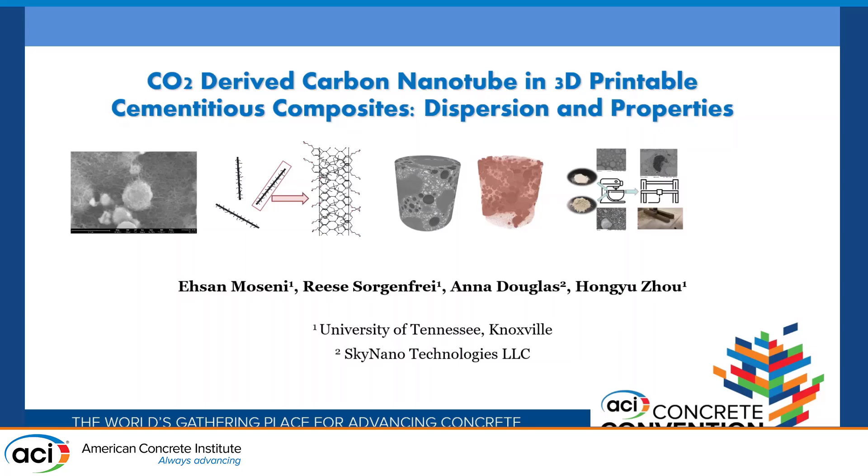Today I will be talking about a fairly preliminary stage study of using CO2-derived CNTs and nano-structured carbon in 3D printable concrete mixture. This is a collaboration between University of Tennessee and SkyNano Technology, a startup spun off from Vanderbilt University. The founder, Dr. Anna Douglas, did her PhD in chemical engineering and started a very interesting process.

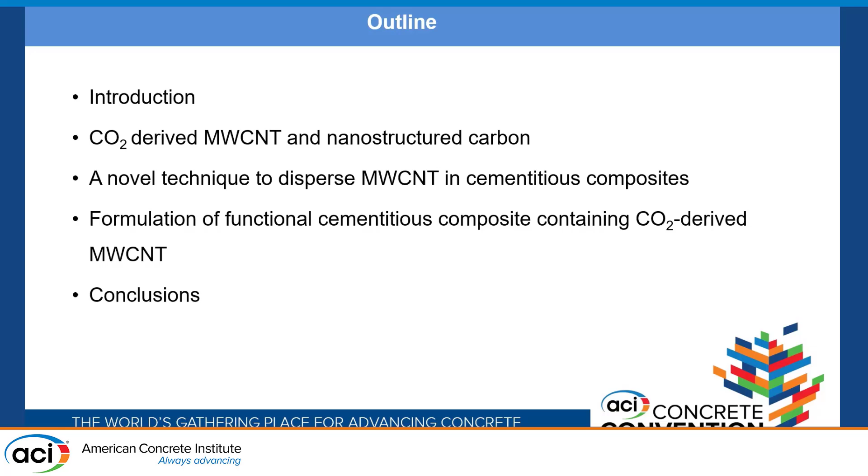I'll talk a little bit about the background in concrete decarbonization and the process of converting CO2 into nanostructured carbon, the dispersion of that into cementitious systems, and some preliminary tests on the 3D printing side that we have done in our lab, followed by some conclusions.

As we all know, cement manufacturing is a carbon-intensive process. The CO2 emissions primarily come from two sources: the heating and combustion of fuels releases CO2, and the decarbonation of calcite from limestone also produces a fair amount of CO2.

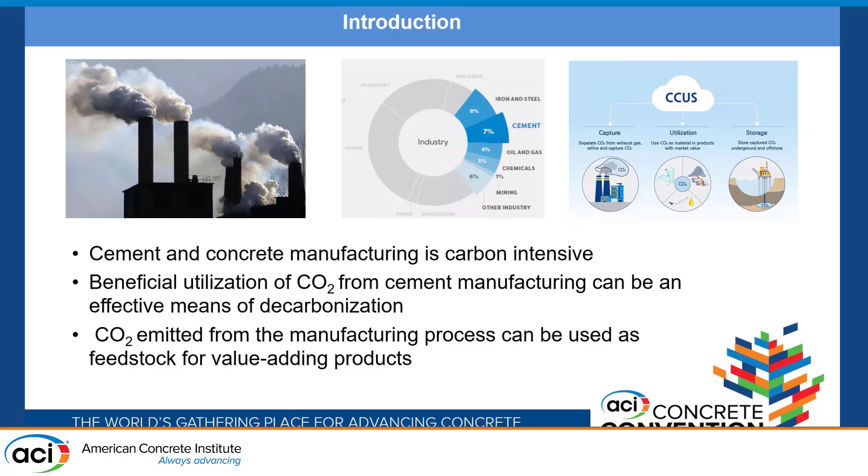In trying to decarbonize cement and concrete, we take two approaches. One is trying to beneficially utilize CO2 to produce a value-adding product, and at the same time, in concrete manufacturing, we try to reduce the use of Portland cement as much as possible, often by increasing the use of SCMs, or supplementary cementitious materials. The thinking for this project is can we combine these two approaches and find a synergistic way of decarbonizing cement products.

One of the technologies, developed by SkyNano, is an electrochemical process. This wasn't invented recently - it's been known for over 100 years that in a molten salt reactor, typically using lithium carbonate, and using an electric field, carbon deposits on the cathode side. The CO2 is used as a feedstock in the reaction, and oxygen is released on the anode side.

But until recently - this was the PhD study of Dr. Douglas and SkyNano - the discovery was that by templating the surface structure of the cathode, you can essentially control how the carbon is deposited and its morphology, going from carbon nanotubes to much larger carbon particles, which I'll show a bit later.

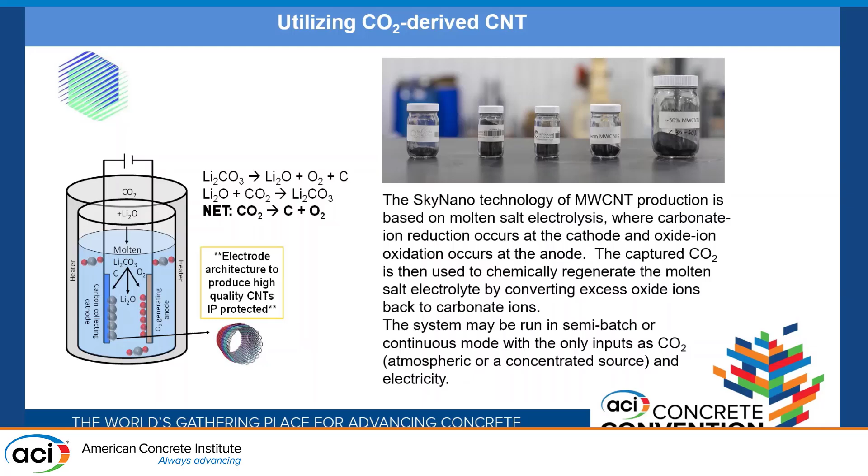So the thinking is, if we wanted to consume the CO2 released from the cement manufacturing process, this is an early stage sketch where we take the exhaust gas from the cement kiln and use that in the reaction to produce carbon nanoparticles.

Once again, by controlling how much electricity or current passes through, as well as the cathode structure, they can produce different forms of carbon, going from smaller diameter carbon nanotubes to what they call carbon zoo - larger carbon particles. They have explored applications in batteries and tires, to replace carbon black in that sense.

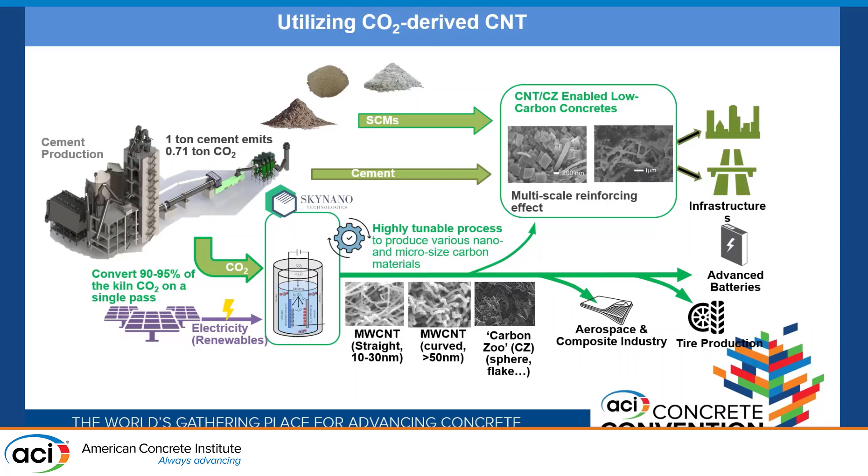For us, in this process, we're thinking: can we use part of the carbon that's been produced, in synergy with SCM, to produce a lower carbon footprint concrete product. That's the goal. And in that process, of course, the challenge is dispersion - that's something we looked at first in this research.

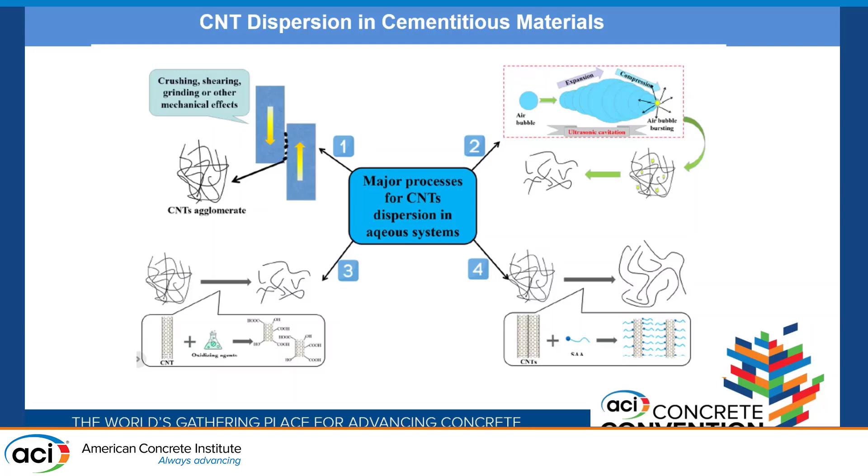Dispersion of CNT in cementitious systems has been studied for quite a while, using different approaches from mechanical sonication to chemical methods like surface grafting or dispersants to try to disperse the particles. One challenge, following the dispersion process, is that to use it in a cementitious composite system, we want a stable suspension before mixing with cement. Having a longer storage shelf life is challenging because once dispersed, these nanoparticles tend to agglomerate.

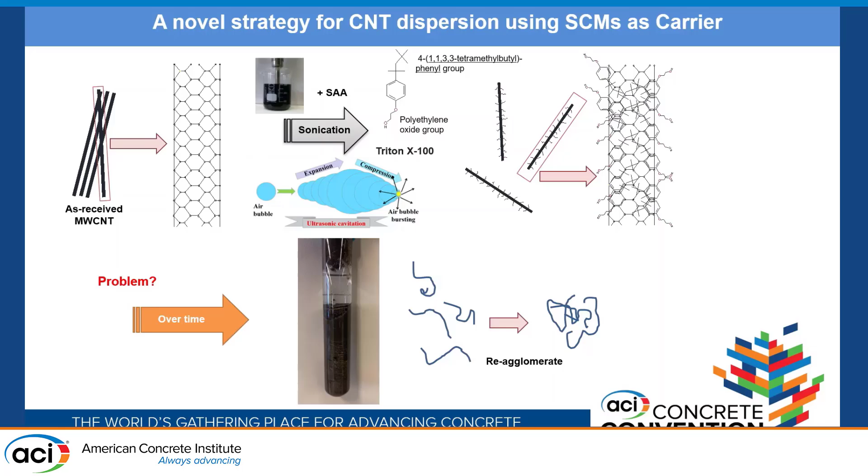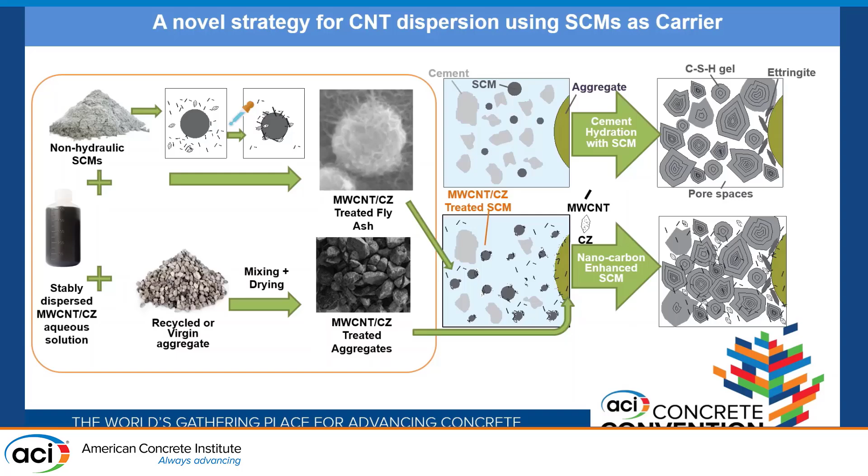So one idea is: if we use SCM in conjunction with the dispersant, can we use the SCM somewhat as a carrier to deliver the nanoparticles in the cementitious system? We started experimenting by simply mixing SCMs with the slurry - we tried fly ash, and both fly ash and silica fume together. First we sonicate with dispersant, a typical way of dispersing CNTs, then we added the SCMs, in this case both fly ash and silica fume, to produce the slurry.

Does it work? Of course not. That's just part of the process.

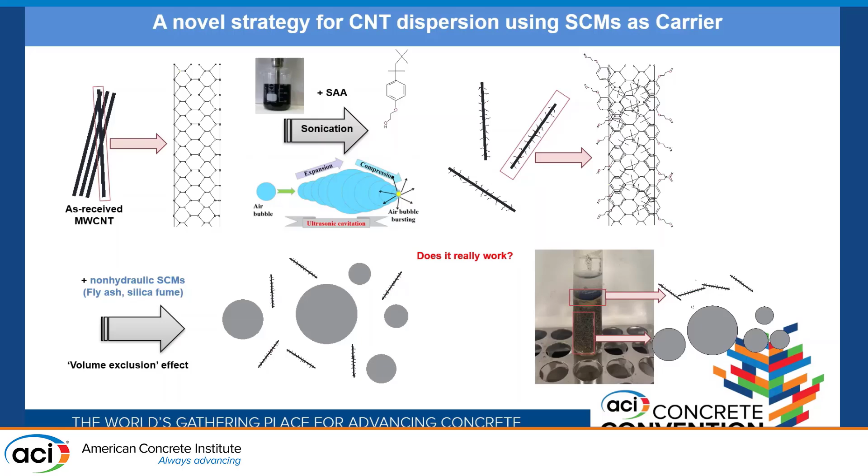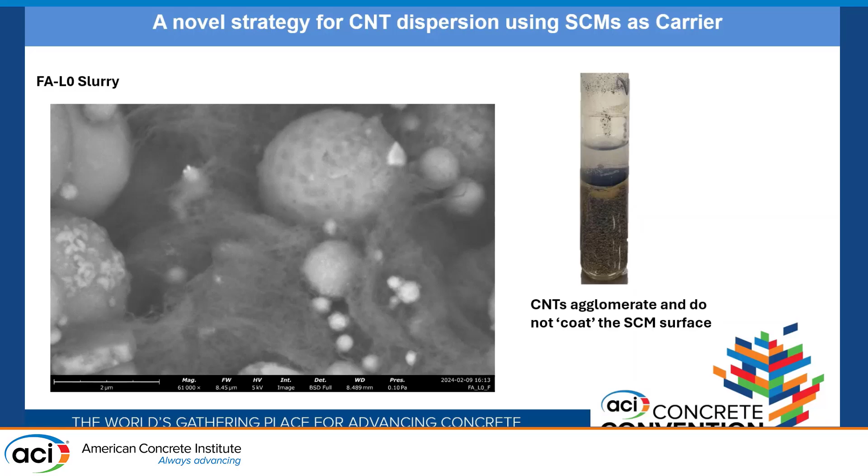After about a day, it's still separated. We see the deposition of the SCM particles on the very bottom, and then the carbon forms a layer, and everything is separated. So we took some slurry, put it under SEM, and can clearly see fly ash stay fly ash. There's nothing really attached to it, and all the nanotube is still agglomerated around it. So going from there, we said, can we just change things a little bit?

So we added latex particles, because before we had another project dispersing CNTs in latex, and it was fairly successful and easy to do, and latex is added into concrete. We said, why not? We basically used a polyacrylic latex polymer, hoping some of those functional groups on the latex polymers would associate with the dispersant and attach it to the SCM surface.

So we simply mixed those ingredients, and separation happened again. This time, we just simply added another layer of latex to separate it from everything else. So we started wondering what we did wrong.

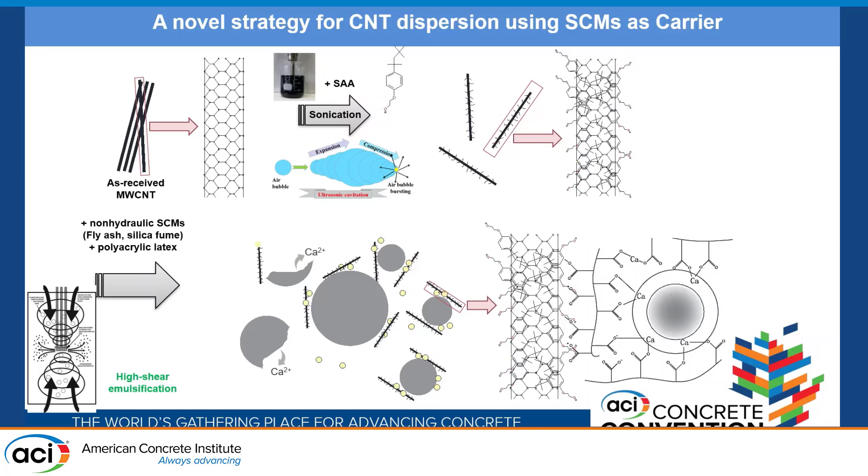And here is where we started figuring things out, by adding a high shear emulsion process where the emulsification uses a high-speed mixer, and the vortex process goes through all the SCMs and latex particles. It's a physical process, but really I think what happens there is that it forces the interaction between the surface of the carbon with the latex, and most importantly, you start to break up some of these SCM particles, as Professor talked about before. It releases metal ions into the solution, and that's really the cross-linking agent that's needed in the process.

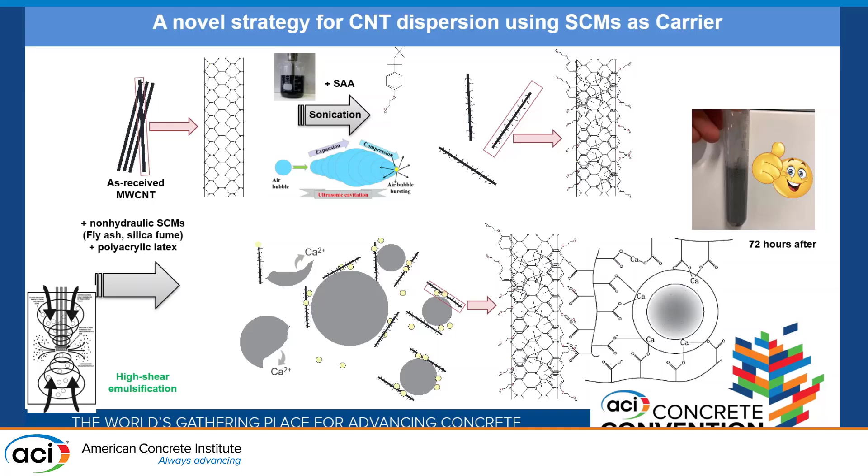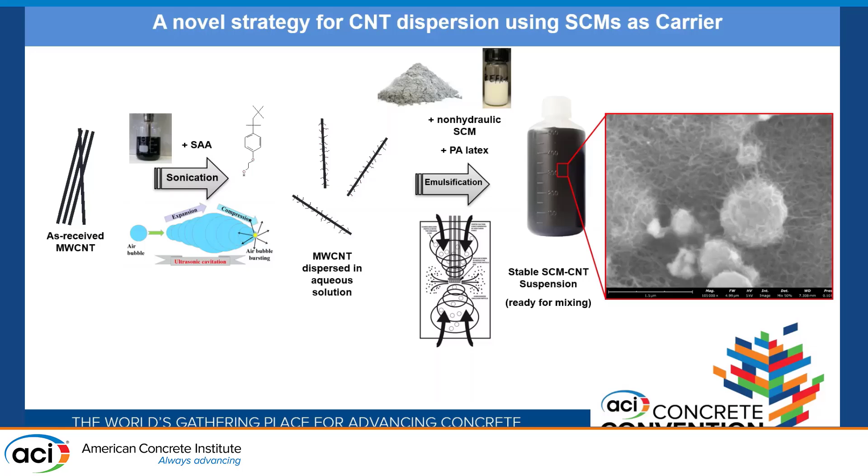And finally, we started getting stable suspensions. Even after about 3 days of sitting there, it doesn't separate anymore. So we further took that under the SEM, trying to look at it, and the nanotube started to coat the SCM surfaces. So those are just more pictures showing how it started wrapping around all the SCM particles.

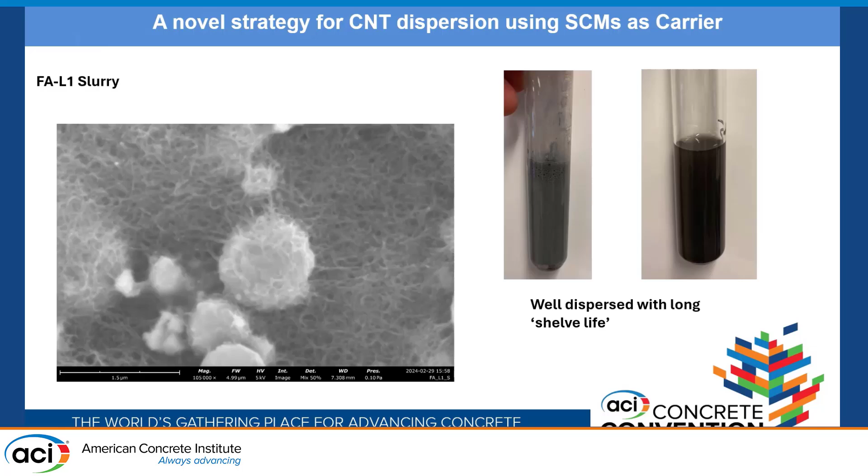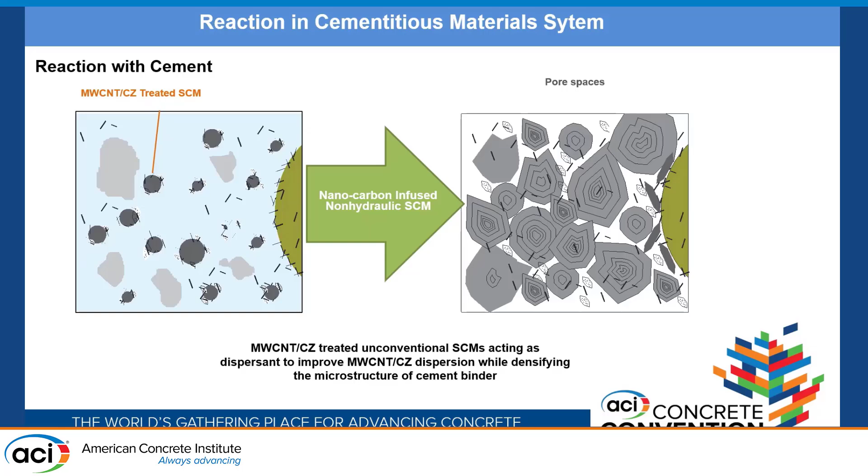And then we started experimenting with delivering that, just mixing it with cement paste. The hope is that because the suspension carries it, the SCM is used as a carrier to deliver the nanostructured carbon into the cementitious system, and in the hydration process, it will help with the dispersion.

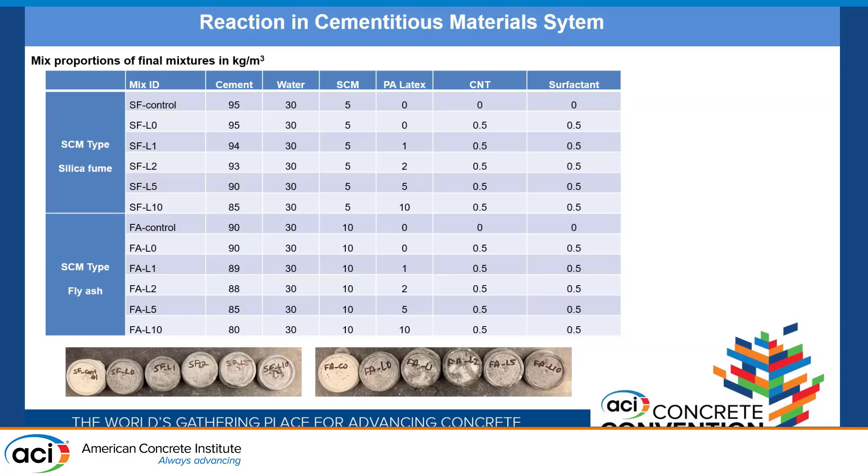With that made, we started to look at how it interacts with cement, because one of the important things is we use latex in the system, and we have to be careful because the latex, if we had too much of that in the cement paste, it will retard it. But if we don't have enough, because it's quite essential for how we did the dispersion, then it affects the dispersion itself.

But any excessive amount into 10% starts to have a retarding effect. So that's for silica fume, and that's where we come to that 2% being the magic dosage for that particular amount of silica fume and CNT that we use in that system.

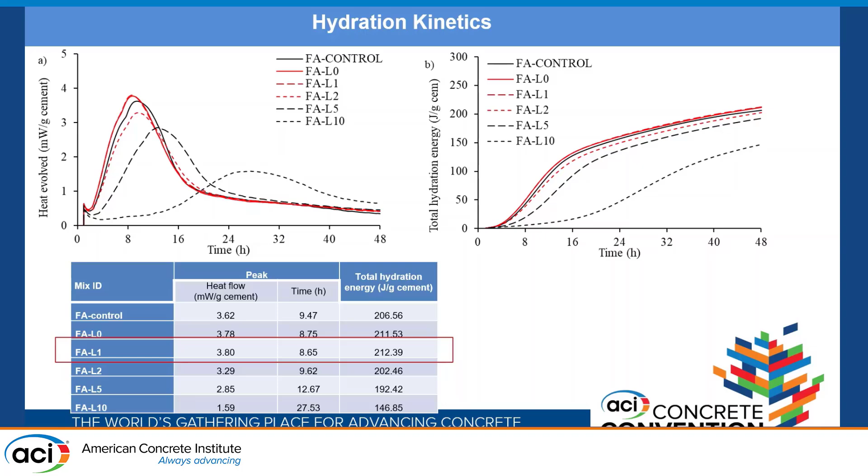And for fly ash, it's a similar story where we basically change how much latex polymer we're adding to the system. In this case, it peaked at 1%. When it gets into 2% and above, it starts to drop. This is pretty obvious because silica fume has a much larger surface area, and therefore the amount of surface that can be combined with latex polymer is much larger, and even with a lower dosage we see a higher tolerance of how much latex polymer we can add into the system.

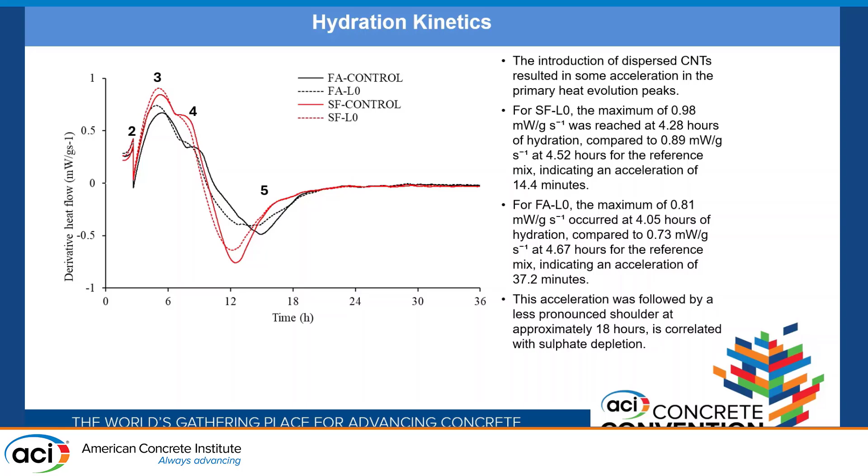The difficult part for us, I think we had a little bit of discussion in the committee meeting before, is how we should really quantify how well the particles are dispersed in hardened cement. What we try to do is use FTIR to see how well the CNT is dispersed in the system. The thinking process there is that we know how CNTs will essentially affect the FTIR spectrum.

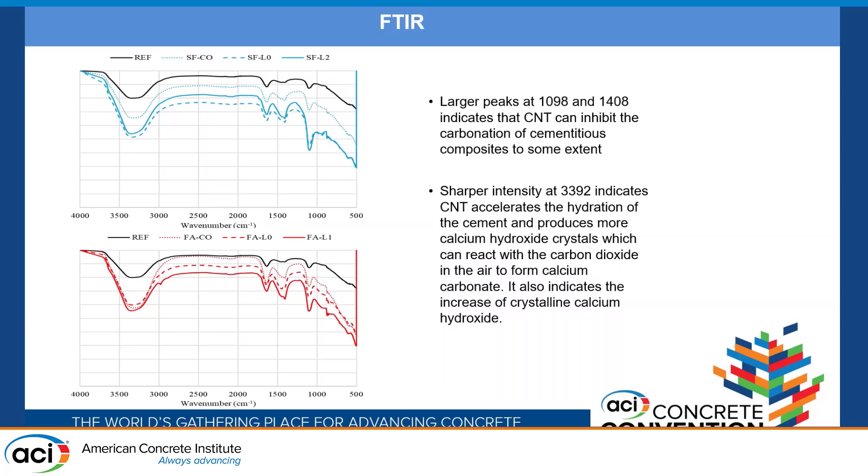There's been early research in this area where we used the same amount of CNT in all mixtures. We wanted to see if a more pronounced effect of hydration acceleration and inhibition of carbonation could be achieved. We looked at whether our process helps dispersion, which the FTIR spectrum shows a trend toward, and the latex polymer emulsification process pushed us toward that more pronounced effect.

We tried to find evidence under SEM to look at the dispersion. In the case without any latex emulsification process, we still see agglomerates of CNTs and various spots. Just showing a couple of examples here, you can see in the background there's not much CNT present.

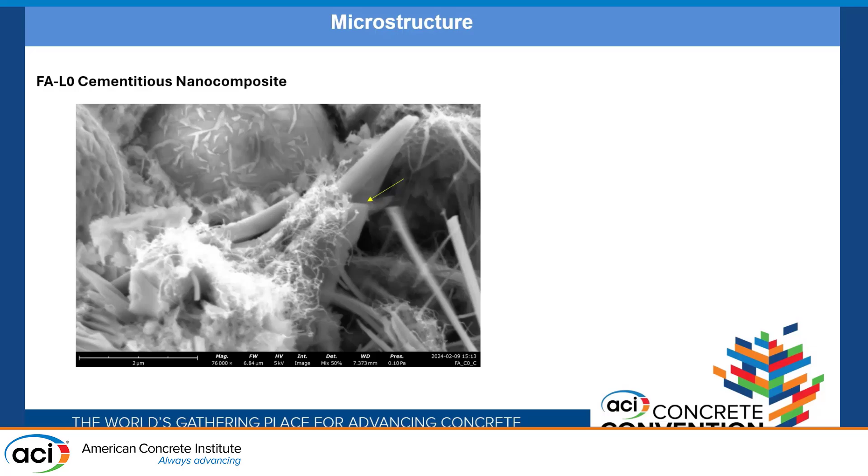This is the case that carries fly ash. The fly ash surface is very clean, and you have large clumps of CNT forming nearby, which indicates it does not disperse well in those cases.

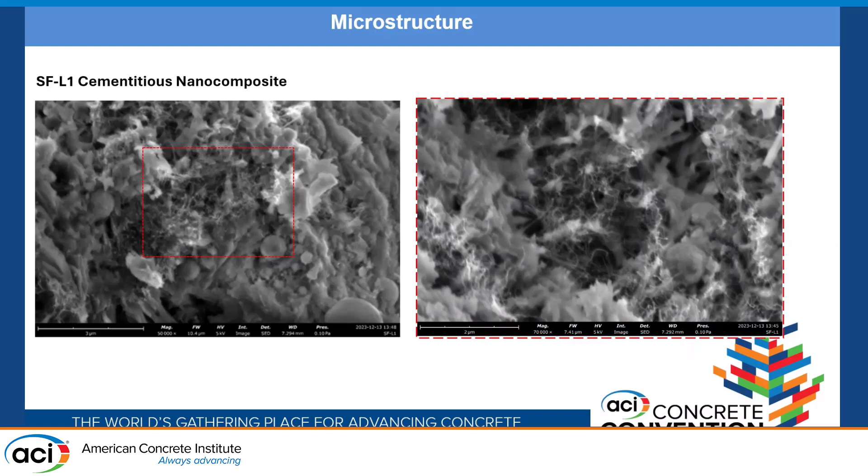This is the sample where we used silica fume as a carrier, and under SEM it shows the nanotubes are dispersed quite a bit better in those cases. It doesn't eliminate all the agglomerates, but it reduces them in our observation.

We ran additional experiments to see, because of that effect, if we could synergistically bump up the dosage of SCM in conjunction with CNT. With normal mixing, the dosage is typically capped around 0.5%, but in this case, can we go higher—1%, 1.5%? The result is promising.

What we observed is that if we use SCM as a carrier to attach the CNT to its surface and use that to deliver into the cementitious system, we can get the dosage quite high without completely changing the rheology.

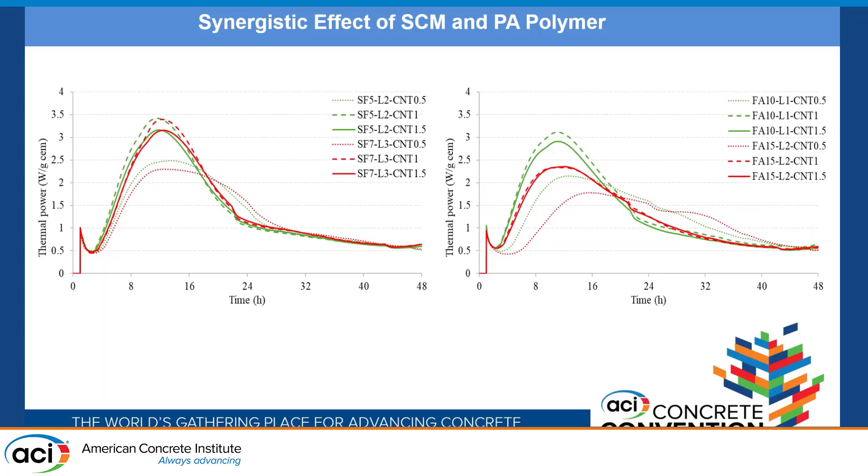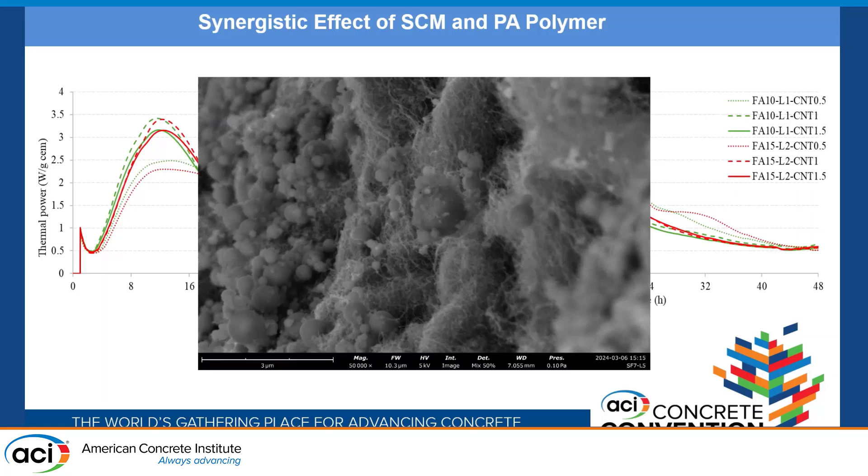These are examples with a high amount of CNTs and a high dose of silica fume. You can still see the silica fume acting as a carrier medium in this case to disperse the CNT. This was a preliminary study we did, trying to make a functional cementitious system with a higher dosage of CNT for use in 3D printing.

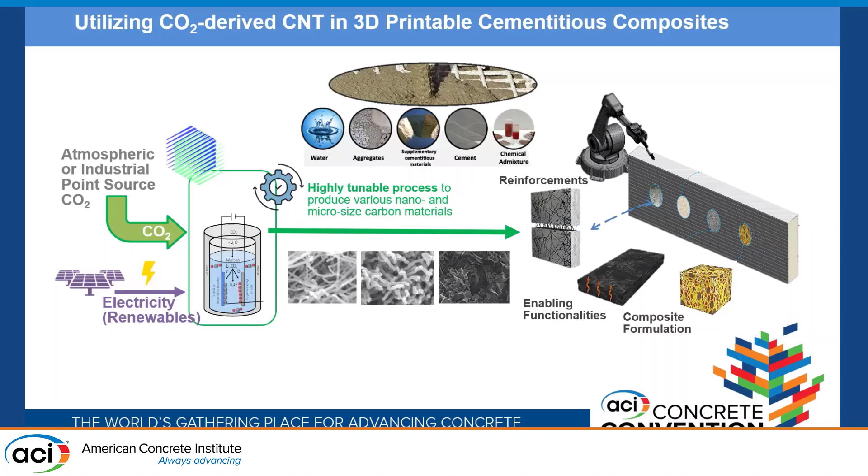This study differed a bit from the previous one. Previously, the CNT morphology was very much like CVD-produced CNT, but in this case, since we were doing it for 3D printing, we communicated with SkyNano and asked for their largest sample size—which I think was a mistake, but I'll show you why in a second.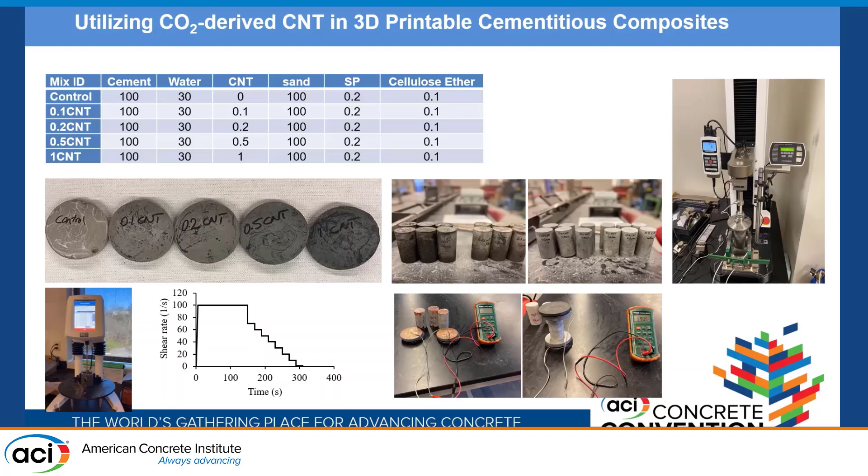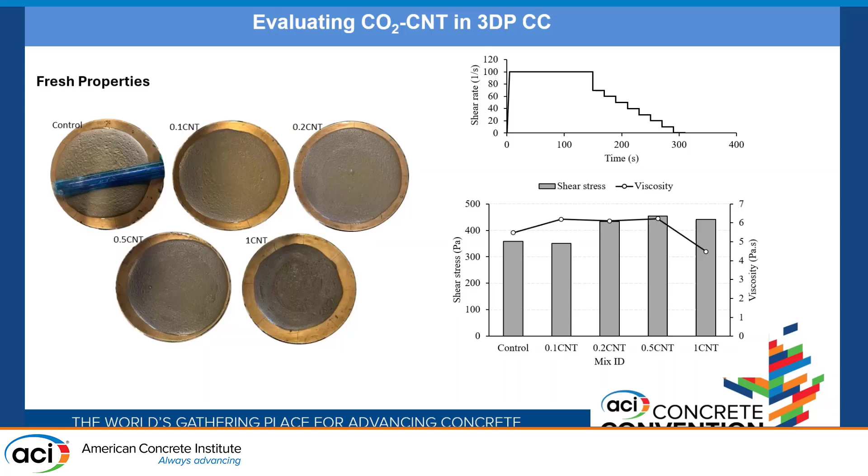We made those mixtures and ran different kinds of studies on rheological properties. As you can see, as we added dosage of CNT, the shear stress started to increase and then decreased. There wasn't a significant change, and a lot of the results we're showing made us wonder why it didn't behave like CNT, which is what we later found out.

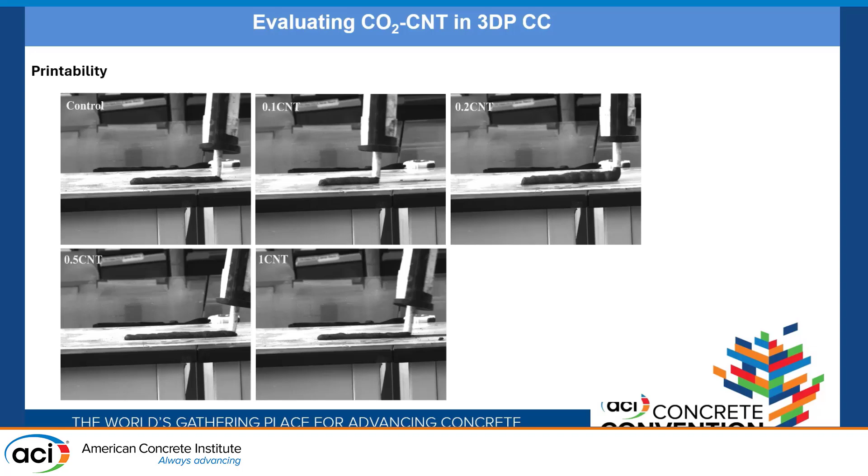It wasn't the CNT that we mixed in. We did an extrudability test with a similar caulk gun setup, but we actually have a lab-scale 3D printer in our lab. We had to stay with this approach because at the time we ran this experiment, Sky Nano only had about 200 grams of CNT—20 grams that we could actually play with—so we had to work with very limited material.

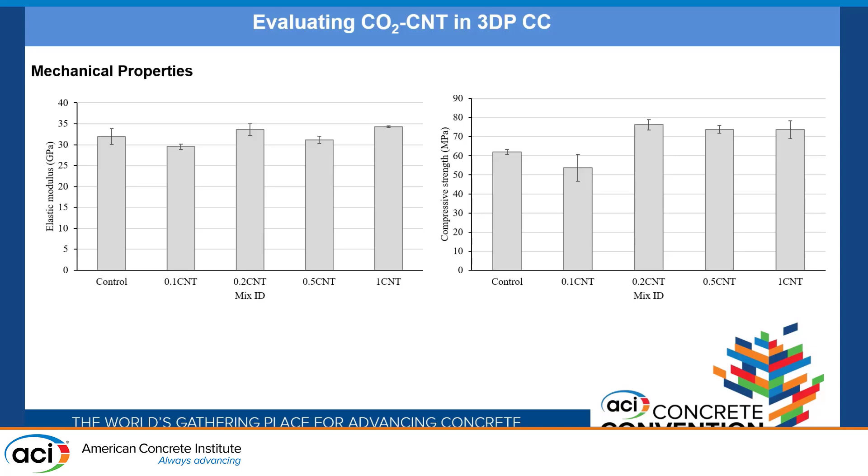When we broke the sample and looked at it under SEM, we found that the largest particle size growing out of the chamber was really a microfiber, not CNT anymore—probably close to 100 nanometers in diameter. Again, this is very preliminary; for the next batch we're going to go back to the smaller diameter CNT and keep doing the experiment.

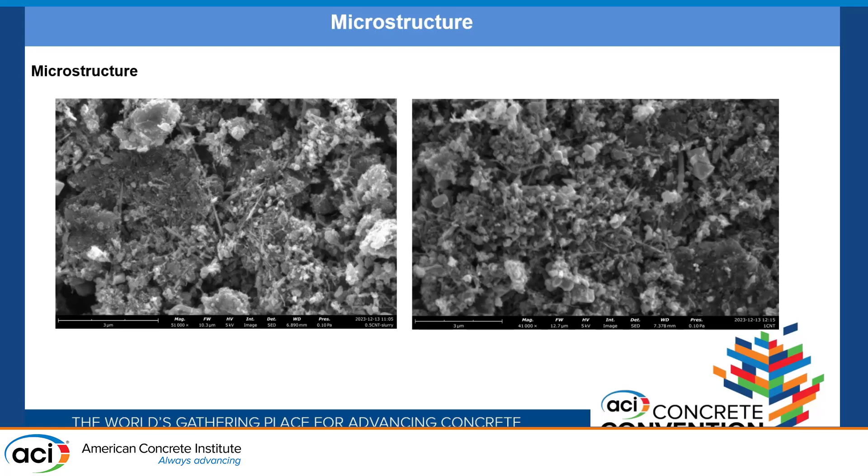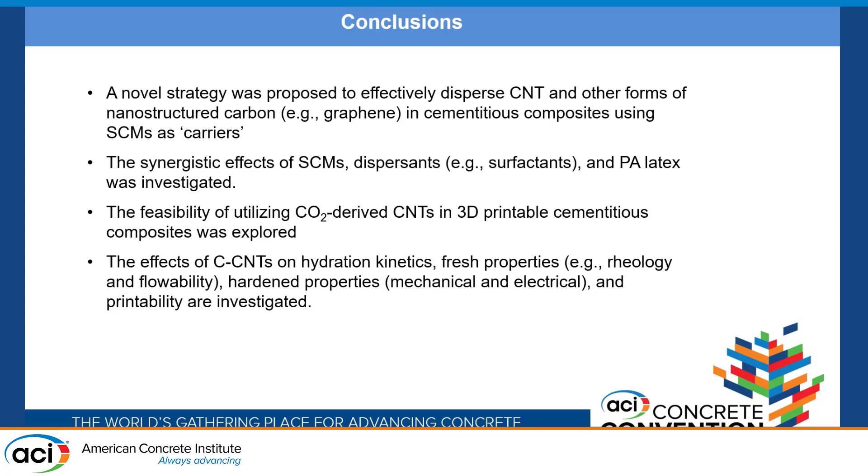I just wanted to cap off with the conclusion. This is a fairly early stage study experimenting with how CO2-derived CNT can be used in cementitious systems. It's an interesting journey so far, because there's a real ability to tune the morphology of the carbon, and that largely changes the interaction with the cementitious system.